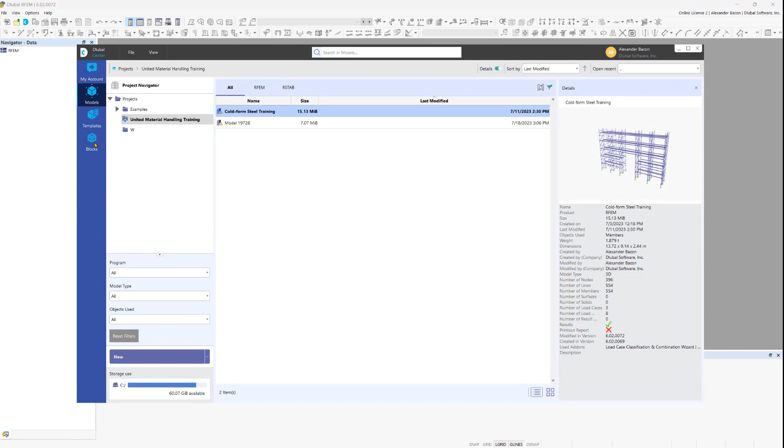In this video, we will become familiar with the user interface and control of RFEM 6. To illustrate the features, we will use a steel hall as an example, which we will model together during this tutorial. If you do not have the finished model at hand, you can alternatively download one of the many RFEM models from our new Dlubal Center and use it to explore the user interface.

Now let us load the desired structural model into the software so we can start.

The RFEM user interface is divided into several smaller areas, each area fulfilling specific functions that are automatically linked to each other to ensure an effective workflow. For example, modeling can be performed using the menu bar, the navigator, or the tables.

At the top, you can see the menu bar. Use the menu bar to access all RFEM functions. It is structured in logical blocks that you can easily access by clicking. The menu opens and you can find model-specific and software-specific settings, commands, and functions.

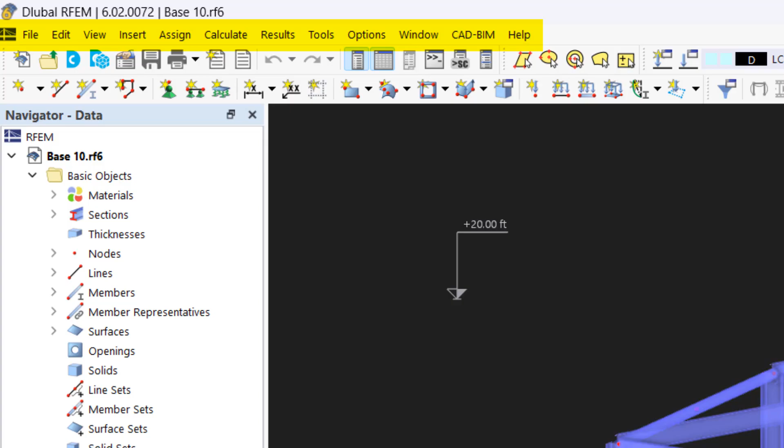Just below the menu bar, you'll see the toolbar. The toolbar provides a selection of buttons and lists for direct access to the most important functions in RFEM. When you move the mouse pointer over a button, brief information about the function of this button appears.

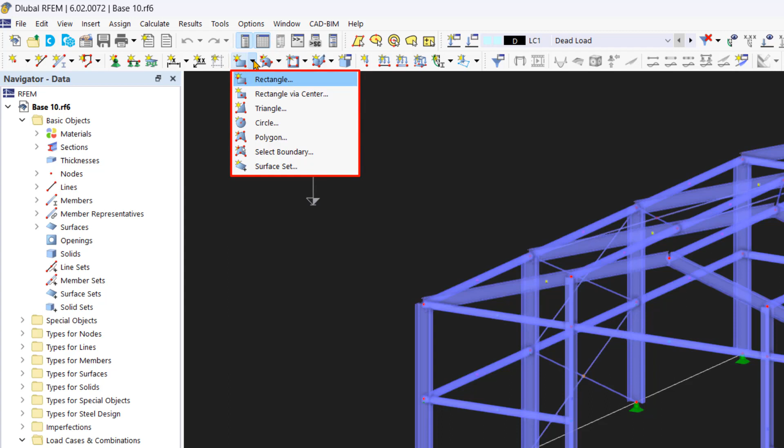Some buttons include subcategories and lists with topic-related functions. To access these functions, click the small arrow next to the button. The last selected command is placed at the top of the list.

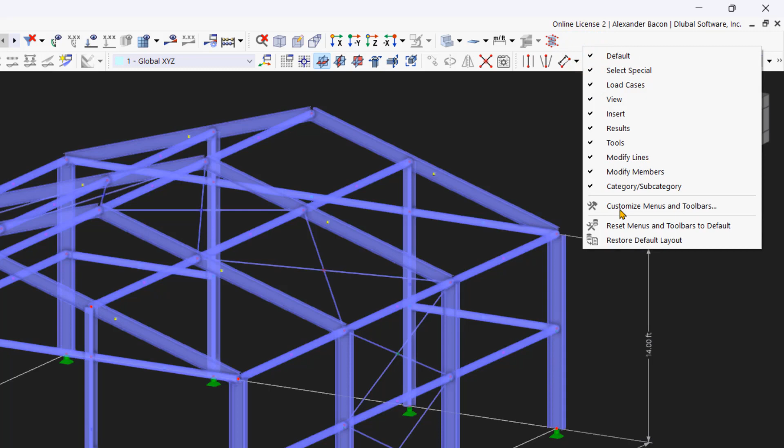Of course, you also have the option to customize the toolbar or even create and save your own toolbar. To do this, right-click anywhere on the toolbar and click Customize Menus and Toolbars. In the window, you can move the desired command into the desired position using the drag and drop function.

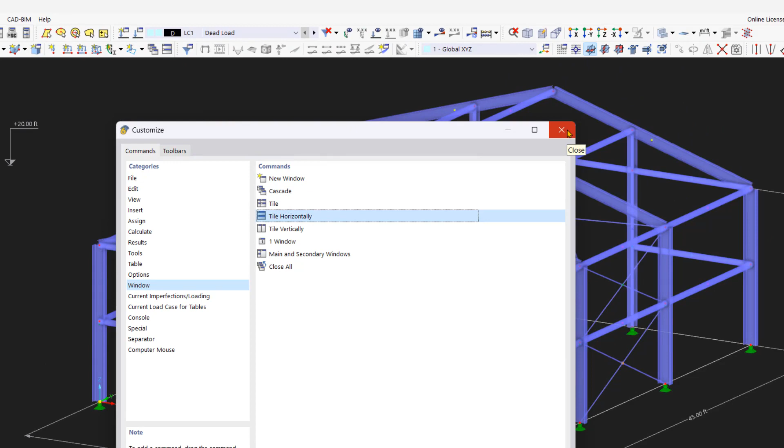For this tutorial, we will stick with simply the default layout of the toolbar, which you can set by right-clicking on the toolbar, by clicking Reset Menus and Toolbars to default.

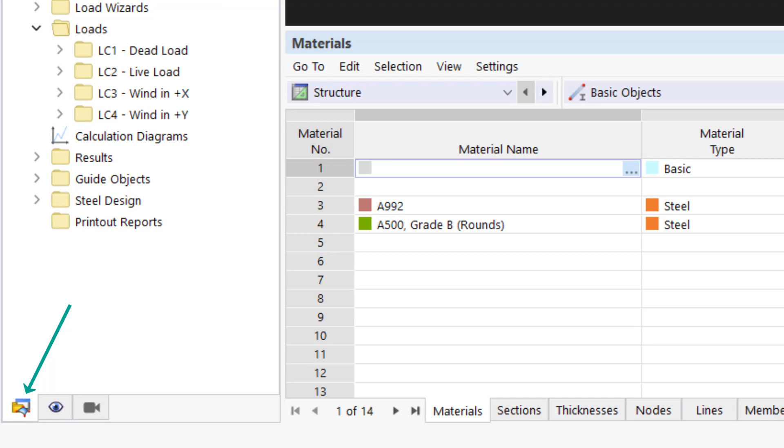The navigator located on the left manages the file data in a tree structure. The first tab is the Data Navigator, which manages the model and design data, as well as the load cases and design situations. It provides a structured overview of the model, including new categories like surface thicknesses, sets of members, sets of surfaces, and much more.

The subcategories of the model data are also new. The main categories represent the basic objects such as materials, nodes, lines, and surfaces, while the subcategories manage specific properties of an object, such as the type of hinges that can be assigned to a line or member.

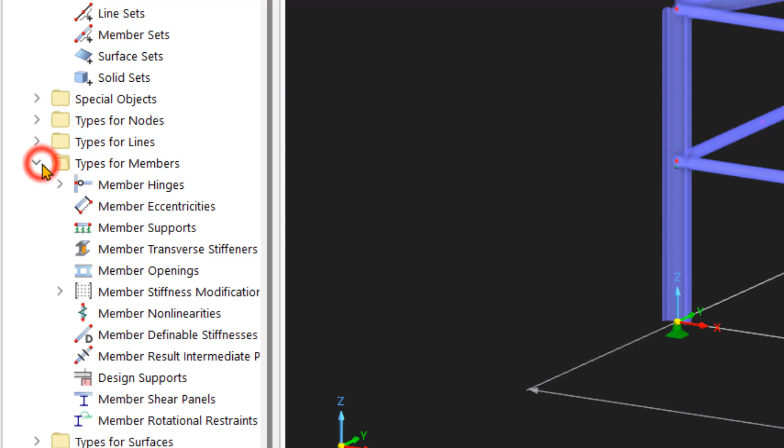Quick tip, if you select an element in the navigator, it will also be selected in the model. For example, you can right-click on the element, choose Find, and a red arrow shows where it is located in the model.

The Display Navigator controls the graphical display in the workspace. Use the checkboxes to switch objects and attributes in the graphic on or off.

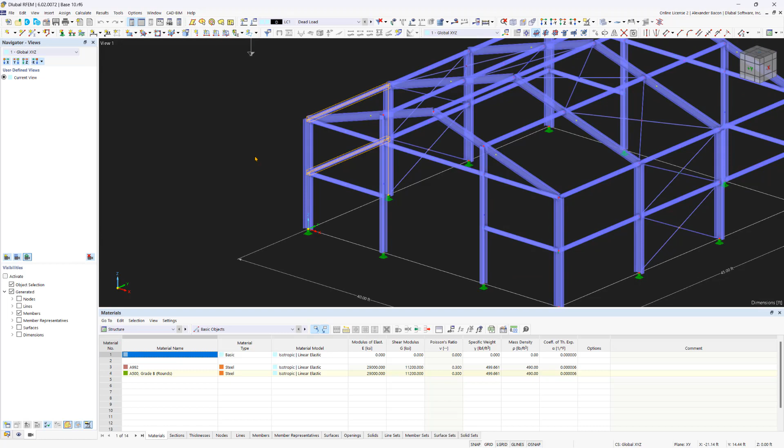The Views Navigator manages both user-defined views and various visibility settings. In the upper part of the Views Navigator, you can create, edit, or delete user-defined views. All these functions allow for an efficient and convenient workflow. We will learn more about working with views and visibilities in later videos.

After calculation, a fourth tab appears in the navigator called the Results Navigator. In the upper part, you can display the desired results, and in the lower part, you can define their display type. We will explore more functions as well as tips and tricks of the navigator during the tutorial series.

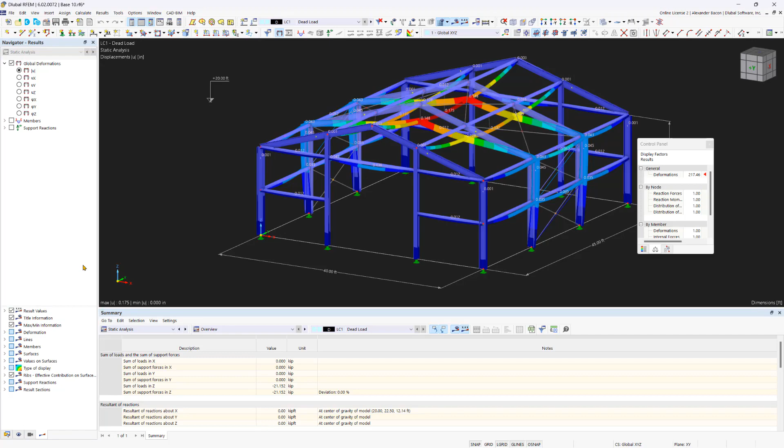In the lower part of the RFEM interface, you will find the tables. The tables manage all model and load data numerically. They represent the internal data structure of RFEM, allowing you to create and edit model data, load cases, results, and much more without having to work graphically.

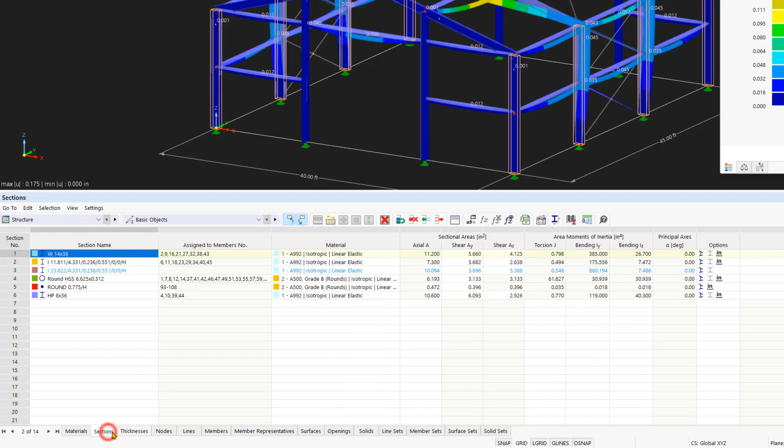The menu bar in the tables is new to RFEM 6. It provides a much better table structure and allows for better functionality compared to previous RFEM versions. Now let's take a look at the controls in RFEM 6.

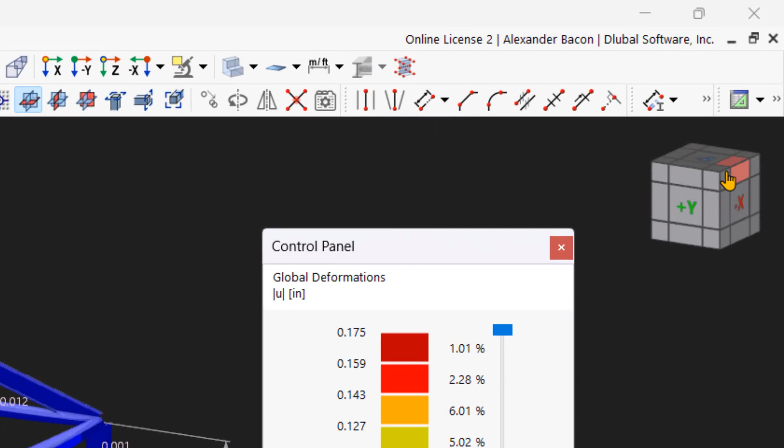The view cube is also new in RFEM 6. You can click or rotate the cube to control the view. Alternatively, you can control it using the mouse and keyboard as well.

To select an object, click it or draw a window over the object. Afterwards, you can drag or copy the selected object anywhere by holding down the Control key on the keyboard while moving the cursor.

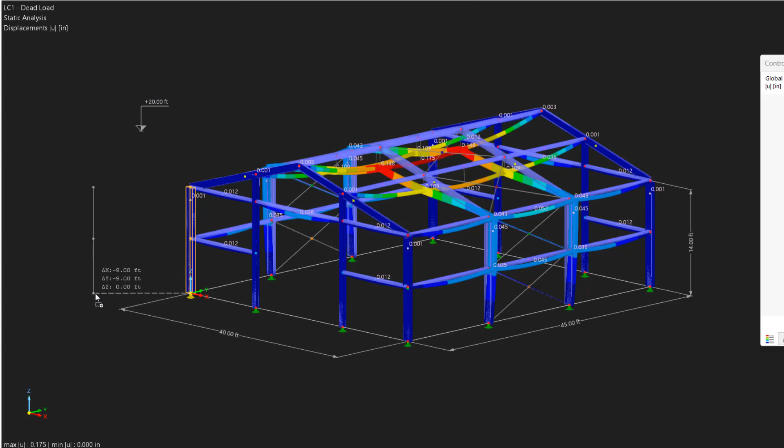If the window is drawn from left to right, only the objects completely within the window will be selected. However, if you draw the window from right to left, the selection also includes objects that intersect the window, such as beams and surfaces.

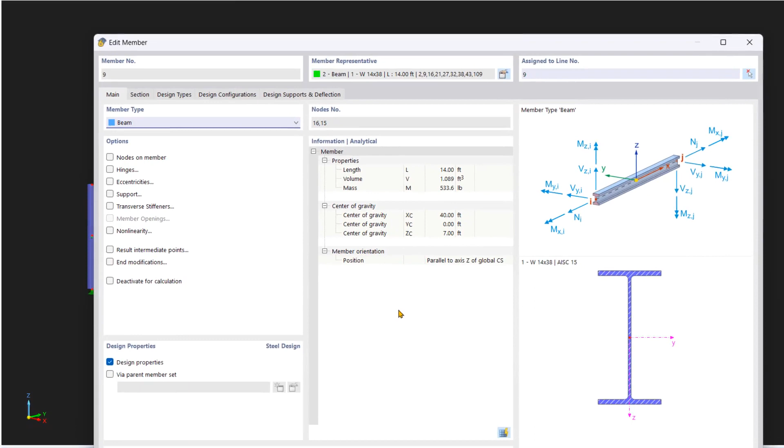To modify an object, double-click it, and the Edit Member dialog box will open, where you can adjust the object parameters.

By pressing the scroll wheel in, you can move the model back and forth. Holding down the Control key and pressing the scroll wheel in at the same time allows you to rotate the model. This is very similar to the cube.

Rotating is also possible by moving the cursor while pressing the scroll wheel and right mouse button simultaneously. With the Shift key pressed and the scroll wheel pressed at the same time, you can zoom in and out. Zooming is also possible intuitively with the scroll wheel or by dragging a window over the desired area using the right mouse button.

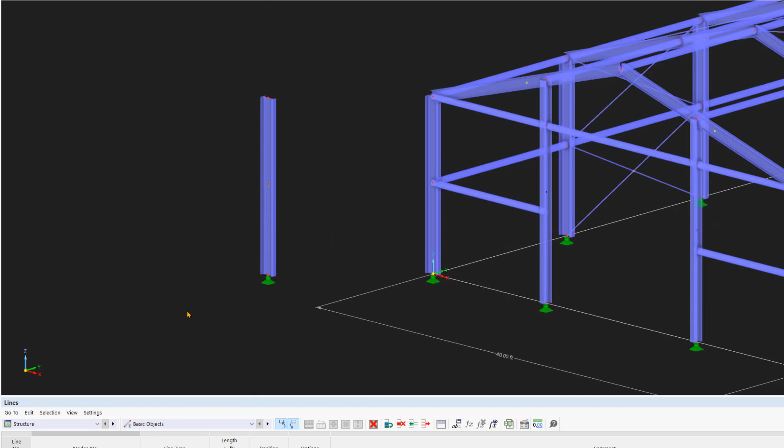To display the entire model, double-click the scroll wheel.

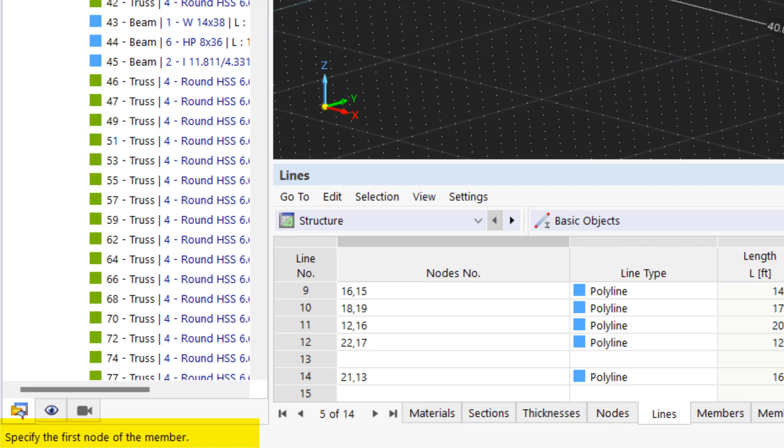The command bar is located at the bottom part of the RFEM user interface. When executing a command in RFEM, a window will open on the left-hand side of the screen, asking you to perform the next step in the command. In the middle of the command bar, you will find a few shortcuts that help with working graphically.

After this extensive overview of the RFEM interface, we will start modeling the steel hall in the next chapter and discover more new features. Thank you for watching, and until next time.